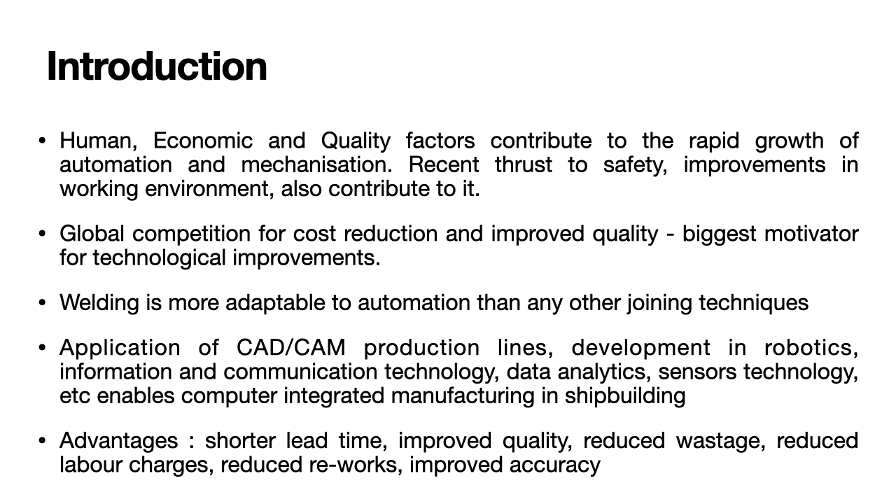Mechanization in welding: if you talk about the Japan story, from 1975 to 2000, if you see that phase of time, the mechanization has drastically improved in the field of welding in shipyards, maybe from 0% to 40%. There are various reasons for this rapid increase in mechanization.

The first and foremost is the shift from shielded metal arc welding, where we use manual or labor oriented welding with stick electrodes. A transition from SMAW to FCAW or MIG welding or flux core arc welding enabled this mechanization.

It's because a process which is fully manual is replaced by a system where it is semi-automated, where the feed of the electrode is through a motor which is controlled with sensors, and the travel speed, if it is aided with the help of a rail guided small wheel enabled machine, it can travel in its own capacity rather than with the aid of a welder. So these are all small mechanizations which enable more productivity.

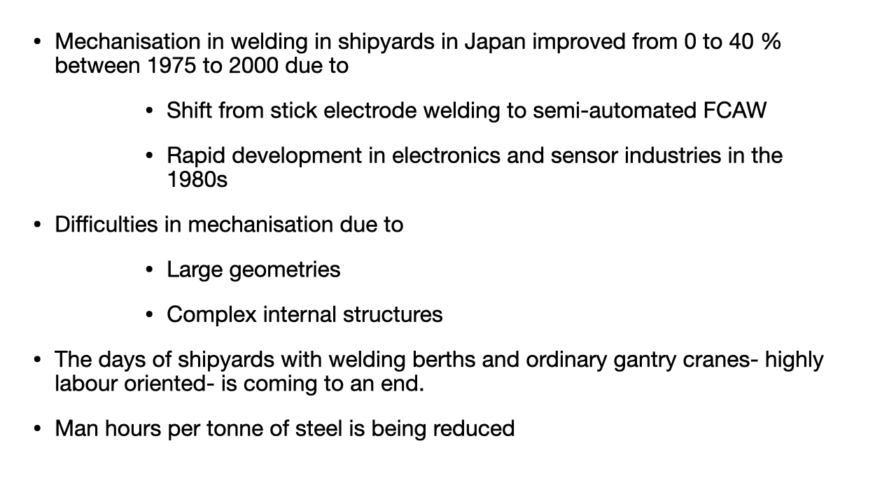And if you see the phase from the 1970s to 2000, we have increased the application of computer technologies, numerically controlled machines were introduced, improved mechanization, and also adoption of various technologies enabled us to reduce the man hour per tonnage of steel to a very large extent.

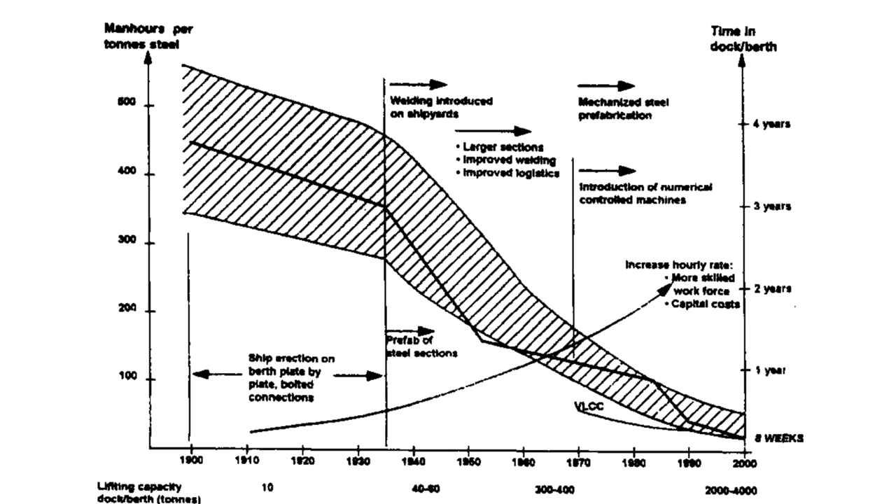It is also aided with the capacity to use heavy equipment, like the development of very high capacity cranes. That means with improved lifting capacity, the ability for a shipyard to compress the time period of construction per ton has also increased.

The block assembly production method is a result of development in welding technology. So as welding technology improves, the production duration for block assembly will definitely improve, and it is one of the most common methods of shipbuilding today.

To highlight the importance of welding and of mechanization and automation in welding, if you analyze the expense a shipyard spends for welding, around 10 percent of the total cost of ship construction is taken by welding alone, which is a very costly affair. And around 20 to 30 percent of the production hours are spent only on welding.

And the interesting part is that if you consider welding as a process in the shipbuilding industry, only around 20 to 30 percent of the production time is actually spent on welding, whereas the remaining 70 to 80 percent of the time is spent on activities which enable welding to happen.

Say for example, for welding to happen, there shall be requirements of scaffolding, there shall be requirements of ventilation, lighting, there shall be requirements of material movement, etc. So there are basically a lot of activities associated with welding, which is not exactly welding but which enables us to perform the weld.

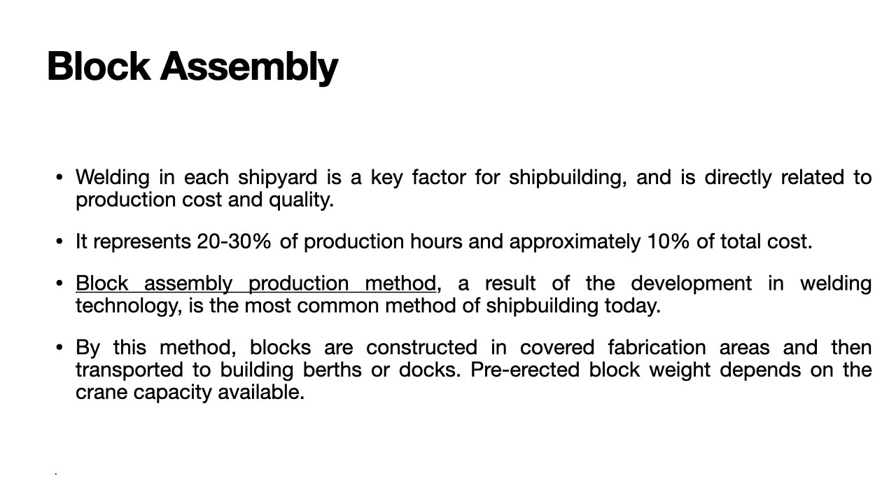In principle, the following production phases are quite standard across all shipyards. Say for example, there will be flat and curved panels which are manufactured. Then pre-assembling happens with stiffeners being welded. Then assembly of these pre-assembled parts to form a bigger part, which is basically known in our yard as the grand assembly phase. And then assembling of the blocks is done, and then ultimately erection is done mainly in areas where we have heavy capacity cranes.

So especially in docks where we have a 300-ton crane and also a 150-ton crane. But in many yards there are crane capacities in the range of 650, etc., where they are able to accommodate a bigger size of assembled blocks.

The good thing with that is that up to that particular tonnage of blocks, it can be assembled on the shop floor, where we have the freedom of multiple equipment that can be powered from the sources installed on the shop floor. And then we have a better environment to work, where accessibility to a lot of tools and equipment is easy. So the bigger the capacity of the crane, the better the productivity improvement will be.

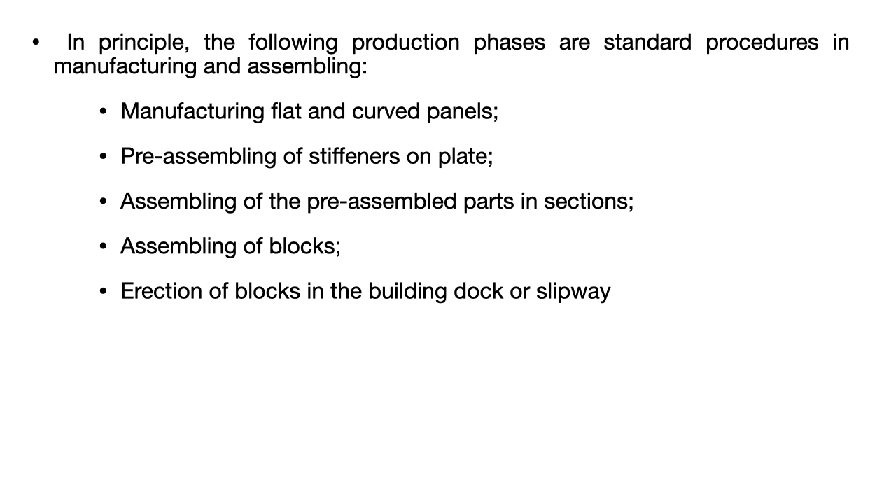So just to show you a very simple diagram which shows how assembly is done. A nesting plan will be done for the plates, then the cutting will be done according to the nesting plan, and then the plates are cut, and stiffeners are also cut similarly, and then assembled over the plates to form the stiffened panels. It can be both flat as well as curved.

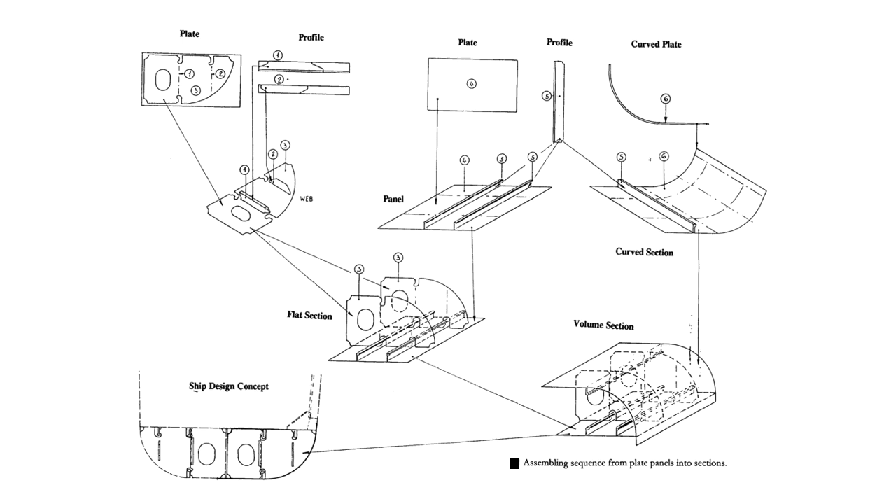If the plate is curved, then it is taken to a bending machine, and initially a template is made with softwood or cardboard or by any means, so that the shape can be prefabricated, and then dies are used according to the required template, and then cross-checked with the template. Then stiffeners are placed, and these are assembled to form small blocks, and then small assemblies are assembled to form a grand assembly.

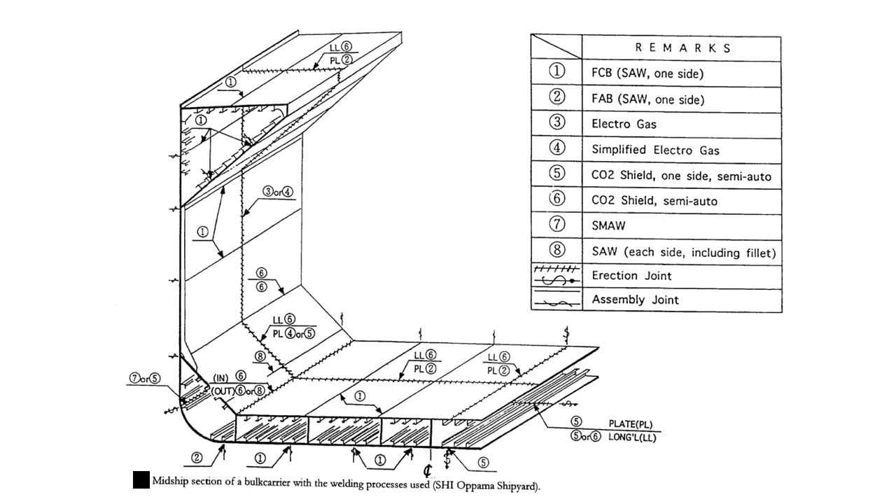Panel line concept. This is what I told in the beginning itself. This panel line, block assembly, etc. are all interlinked. The use of panel and block lines in the fabrication of stiffened plates is based on the principle of transporting materials through individual stations, where these individual stations will have their own specific task. Understood? So there are a lot of advantages associated with panel lines.

Panel lines will increase the productivity, it will increase the quality of the weld produced, because each station shall only take care of the specific task assigned to that station, so that their jobs are well defined. Say for example, a particular stage will look after only welding of stiffeners. So there is a systematic streamlining of production processes, and also improved utilization of floor areas.

It is based on the movement, the transportation of material. So transportation of material in the sense, once blasting is over, then it is immediately taken to the primer area, where in the blasting process only blasting happens, in the primer area or painting area only painting happens, and then it is moved to the cutting area, so on and so forth.

So if you design a particular production process with material transportation in mind, that saves a lot of time, not only time with respect to material movement, but also with respect to the utilization of the floor area, so that there shall not be any zigzag or random movement of material from one place to another. Otherwise, a lot of space will be taken for the movement of material as well.